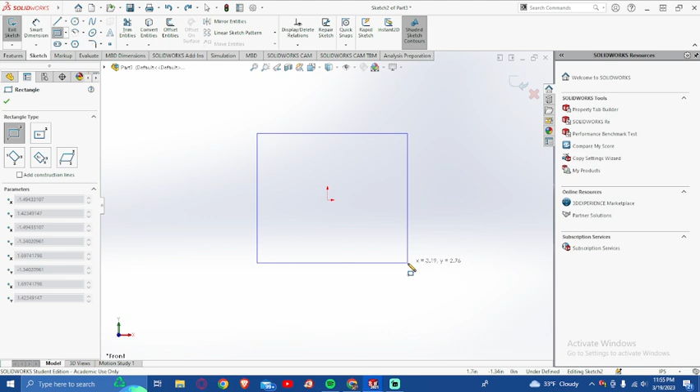After doing this, go back to the top left side of your screen, click Smart Dimension, and then click the top side of your square or rectangle. You will then drag it up and click again to pull up a small box. Here is where you'll dimension the new shape you have created. Click it and then dimension it to 1 inch.

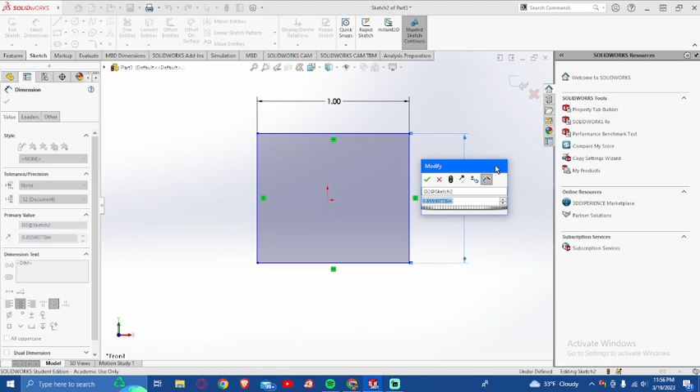Then go either to the left or the right side of your rectangle or square, click again, and then change it to 1 inch.

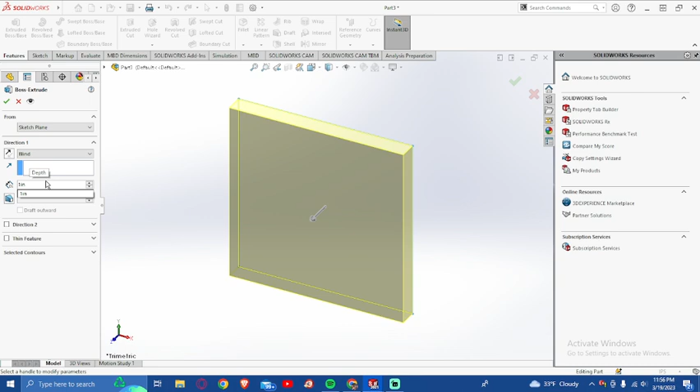After doing this, go to Exit Sketch, click Features, and then click Extruded Boss / Base. This should bring up a yellow icon. Go over to the Direction 1 section and change it to be 1 inch. After changing it to 1 inch, click the green check mark and you should have a new cube.

Now it is time to make all of the sharp edges a little more nice. To do this, we will click the Fillet tool.

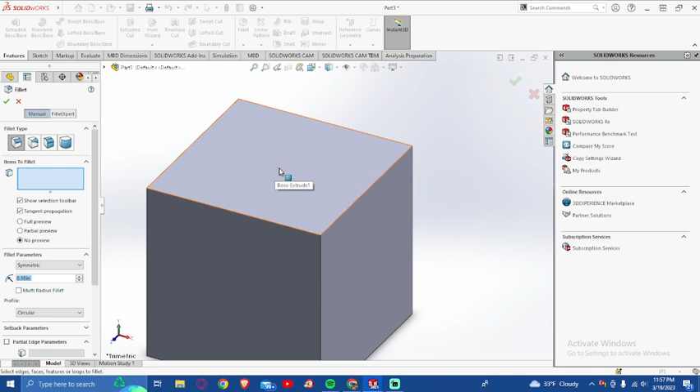We will fillet the top, the left and right side, and then to revolve your cube, you will hold down your middle mouse button and then slowly drag your mouse to reveal the other 3 sides.

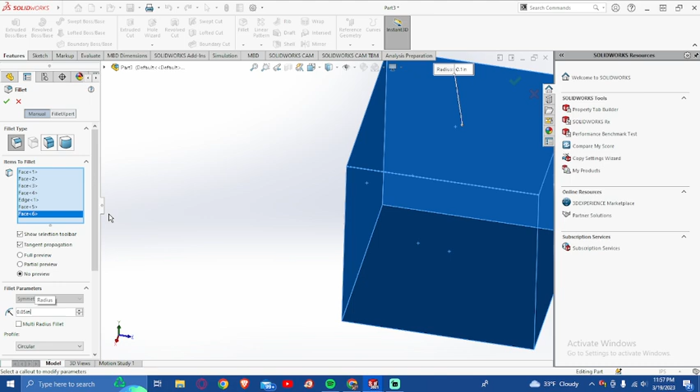After revealing these sides, you will click all 3, then go down to the fillet parameters on the left side of your screen and change it to 0.05 inches. Then click the green check mark.

Now your cube should look a little more nice. To go back to the front face, you go here, click the drop down menu, and then click the front face.

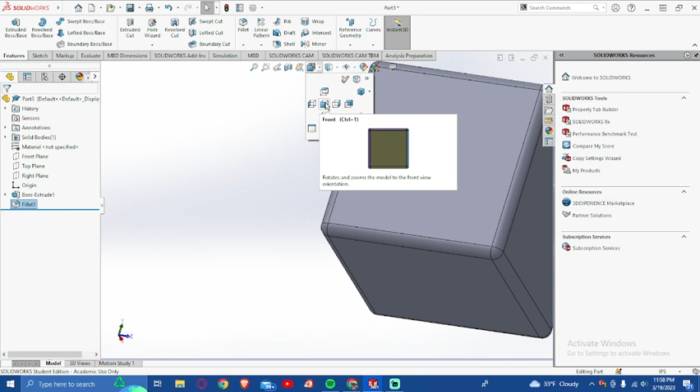After doing this, you will go to Sketch, click the front square, and then you will go back to the rectangles. After you've done this, create 2 separate rectangles, and then click Smart Dimension yet again.

Click the top side of both rectangles and change it to be 0.1 inches. Then go to either the left or the right side of both rectangles and change it to be 0.25 inches long.

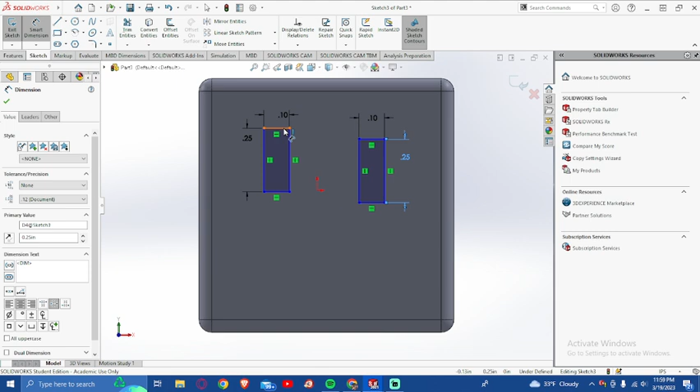Now it is time to center your rectangles. To do this, click the top side of either rectangle and then the top side of the square. You will then change it to be 0.15 inches apart.

Then click either the left side of the left rectangle or the right side of the right rectangle, and then click the closest edge of the square. Change the distance to be 0.25, and then do the exact same thing on the opposite rectangle.

Remember to click the side on either the left side or the right side of the rectangles.

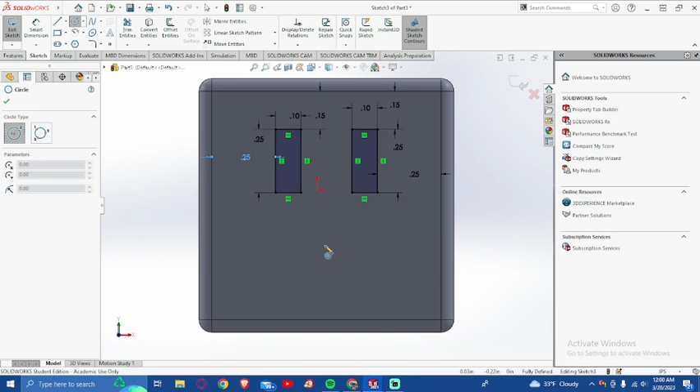After doing this, it is now finally time to create the happy little smile. To do this, go to the top left, click circle, click somewhere inside of the square, and create a circle.

Click again, then go to the center of that circle, click the center point, and create a smaller second circle.

After doing this, it is time to center the circle. You will click the center point of the circle and then click the bottom edge of your square. Change it to be 0.35 inches from the bottom.

It is okay if the rectangle eyes and the smile intersect. I will explain a little bit later.

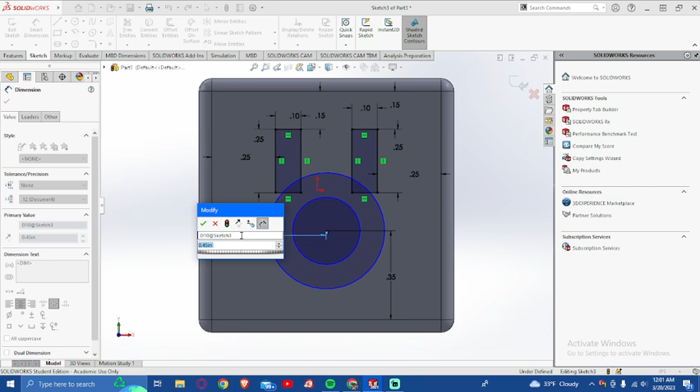After doing this, click the center point of your circle again, and then click either the left or right edge of your square. Change it to be exactly 0.45 inches. It seems as if I just got lucky this time.

After that, go back to the top left side of your screen and click the line tool. Click the center point of the circle and then create a 90-degree angle to the outside of your first circle.

After doing this, do the same thing but going in the opposite direction to the outside of your first circle as well. Now you should see that it's kind of cutting the circles in half.

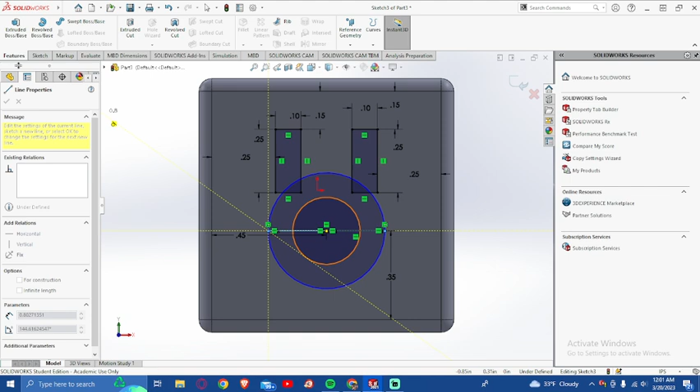After this, do not click the Exit Sketch option and instead click the Features option. In the Features option, you will now click Extruded Cut.

Click the rectangle eyes, make sure that it highlights the entire rectangles of the eyes, and then click the area in between the first and the second circle as shown here.

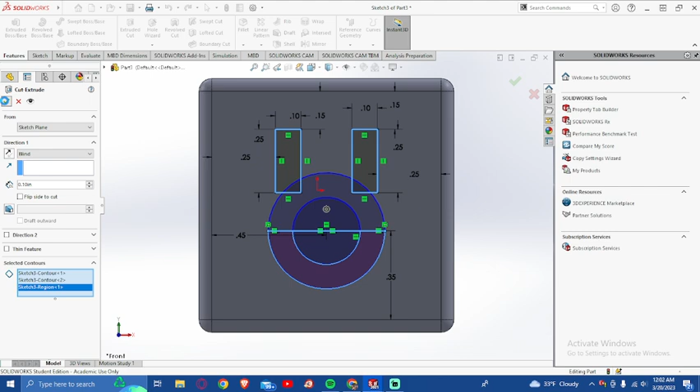After doing this, go to the D1 dimension and change it to be 0.1 inches. Finally, click the green check mark, and now you should have your little smile cube.

To see the smile, click anywhere in the face that isn't part, and then use the middle mouse button to see the indentation of your smile cube.

Now you have learned all of the basic tools in SolidWorks 3D CAD. You could continue to create your own parts using the tools that have been shown, or you could continue on your 3D modeling journey, learning different, more complex tools on either the SolidWorks website or anywhere on Google.